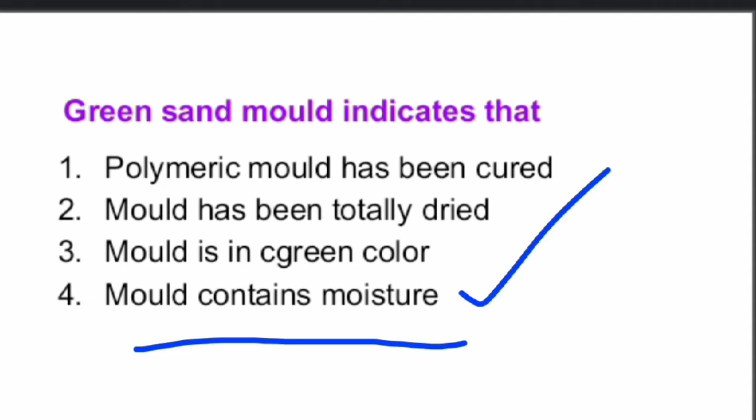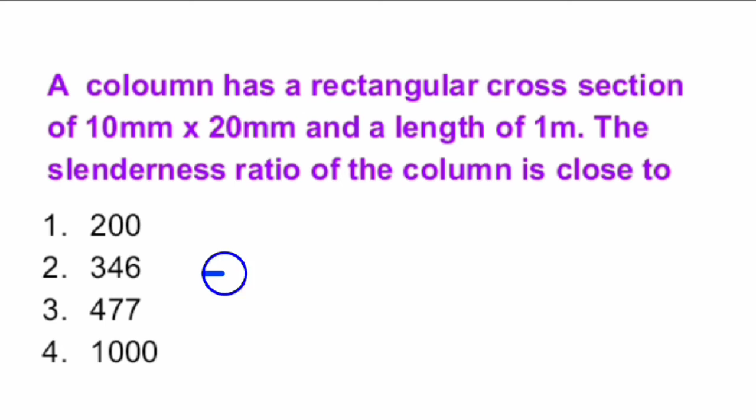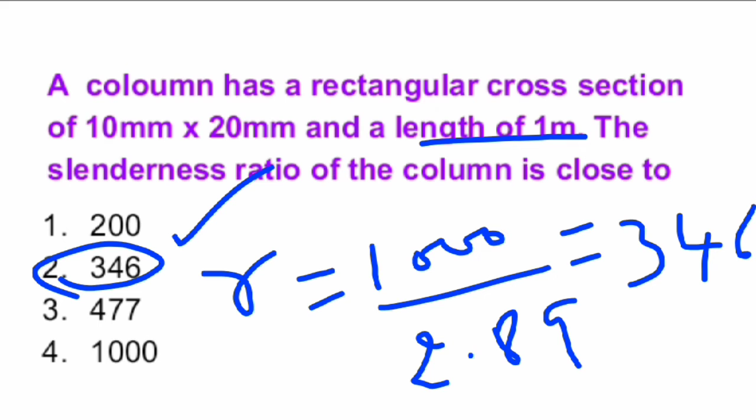slenderness ratio equals to length of column. The length is 1 meter, so 1000 mm, by radius of gyration 2.89, which on simplification we get as 346. Therefore our answer is option 2, 346. The slenderness ratio of the column is 346. Next question.

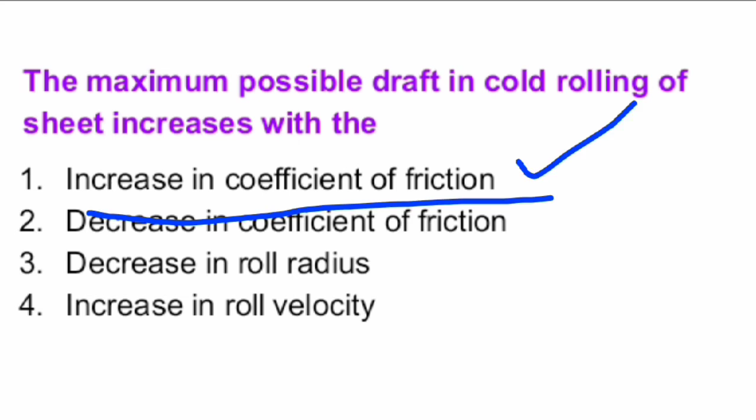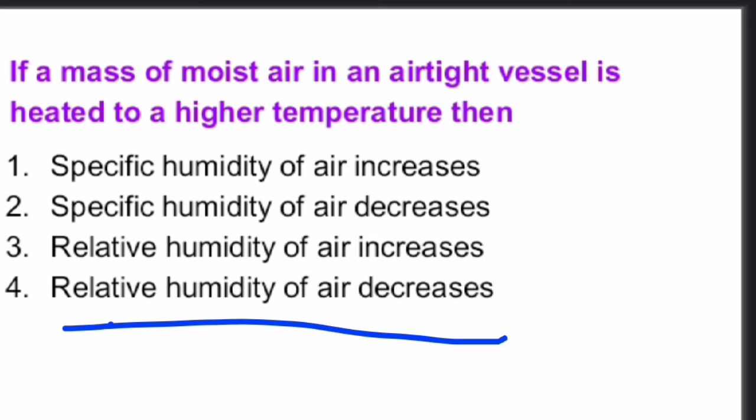Next question. If a mass of moist air in an airtight vessel is heated to a higher temperature, then the relative humidity of air decreases. Next question. A thin cylinder of inner radius 500 mm and thickness 10 mm is subjected to an internal

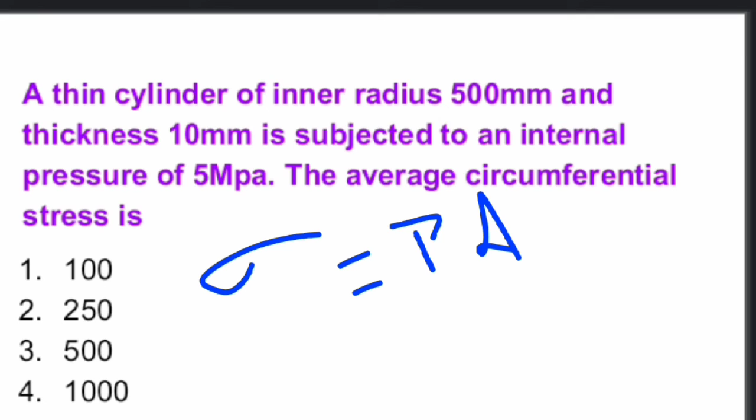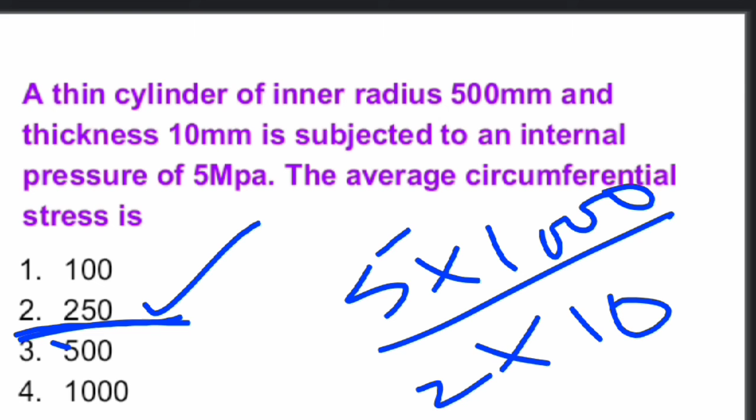pressure of 5 megapascal. The average circumferential stress is how much? Now it is a question related to hoop stress or circumferential stress. The formula for circumferential stress equals PD by 2T. On substituting, P equals 5 megapascal, inner radius is 500 mm, so diameter will be 1000, by 2 into 10. On simplification, we get the hoop stress or circumferential stress as 250 megapascal. The units of stress are megapascal or Newton per mm square.